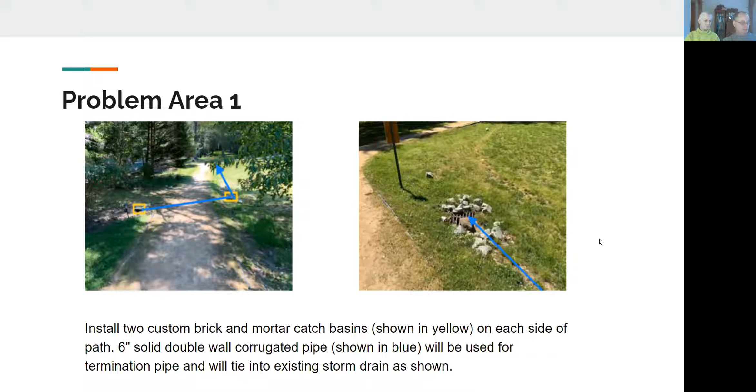The third problem area is probably the largest one. This is over by Audrey Wynn and Alan Perlman, and then Karen Mitchell's vacant lot here and Karen Mitchell here. This area receives a lot of water. If you walk the pathway, you'll see that from Audrey and Alan's side and the Nielsen side, downhill goes from the left to the right, and also from back here where Shahar and Neva and Cheryl and Pete and the Nielsens are, water runs downhill towards Solterra Way.

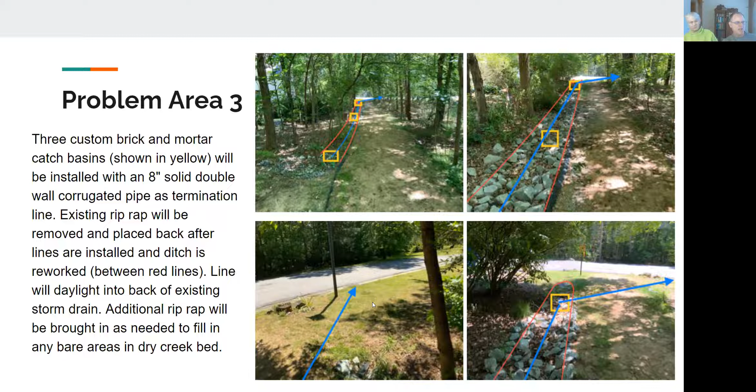I guess I can take questions if people want to, or we can discuss however you guys want to run that part of the meeting before we go into lighting and path surfaces.

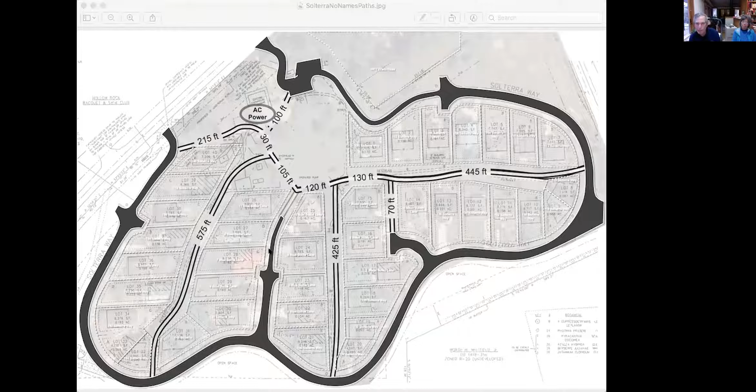So at the moment, this is a 12-volt system, it doesn't hurt anybody. It can be spliced into and put on either side of the path. It doesn't have to go just on one side.

But what it does is it doesn't cause your pupil to contract as much, so you still have your night vision, but it illuminates the pathway. So essentially, that's a basic overview as I see it.

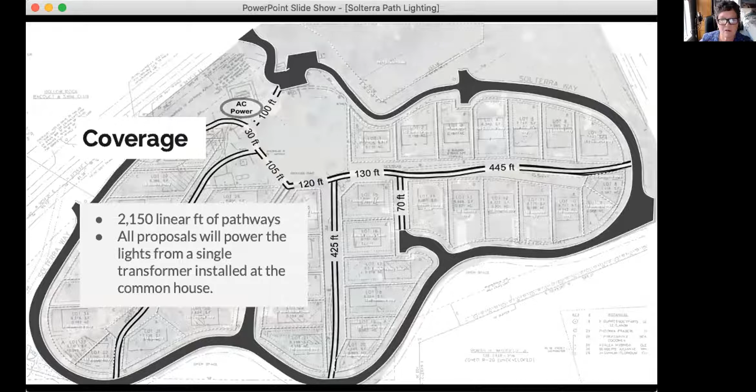I'm just curious about what keeps the lawnmower people from running over them. Right.

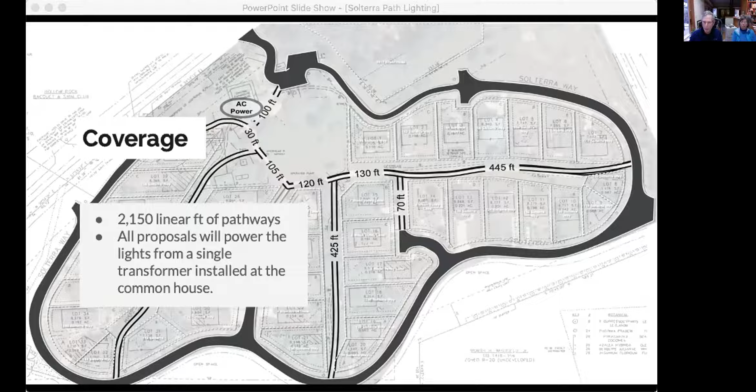The lights would be embedded in a concrete bollard or a post, and the light would not just be a flimsy 1-inch diameter metal stem. Instead, it would be set into the concrete. One of the specifications we requested was that TROSA with their riding mower won't just mow it down, not to mention a dog walker pulling it over. The concrete posts could also be... keep in mind the posts themselves are maybe 12 inches tall, maybe 14. And then above that you have the lighting fixture itself that's set into the hole.

It could be wood. It could be a 6x6 treated post or a 4x4, depending on the location. If no one sends a mower down some of these pathways, this probably doesn't have to be as sturdy, unless you want to consider dog walkers. And I think this is part of the details that we can certainly discuss.

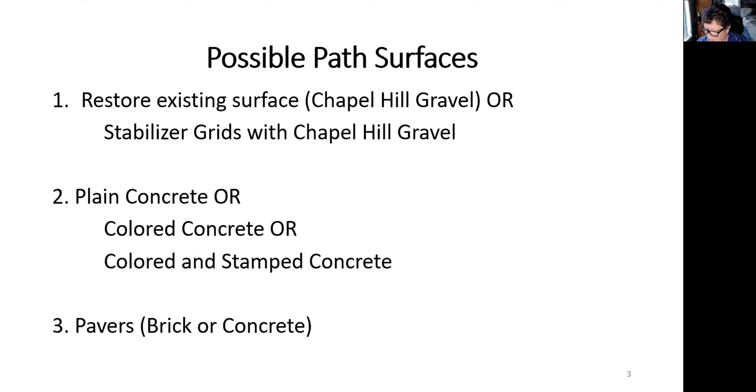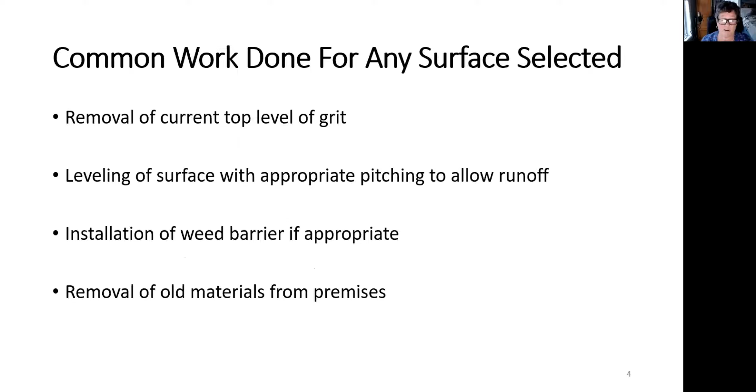Tom and I sought out multiple bids from local companies for each type of surface. We went and looked at examples of many of them, and we feel pretty confident that the bids we got are accurate. One thing to keep in mind is that for any path surface chosen, the contractor will do the following: remove the current top level of grit, level the surface with appropriate pitching to allow water runoff, install a weed barrier if appropriate, and remove the old materials from the premises.

So the first choice is to restore the existing surface, which is Chapel Hill gravel, a decomposed granite. They would scrape off the top, correct any leveling needed, install weed barrier and metal edging. We currently have mostly plastic edging, and then install the gravel on top.

The pros are that it's long lasting—the current path is about 20 years old—and it's attractive and nice to walk on. Some of the cons are that it needs regular maintenance and weeding, and as the path becomes older, more grit is loose and gets walked into our houses.

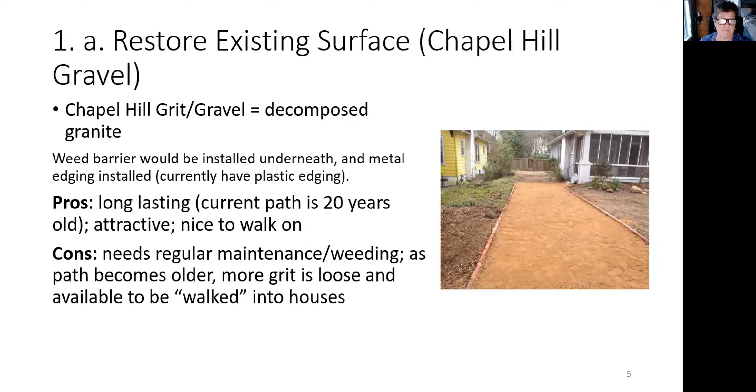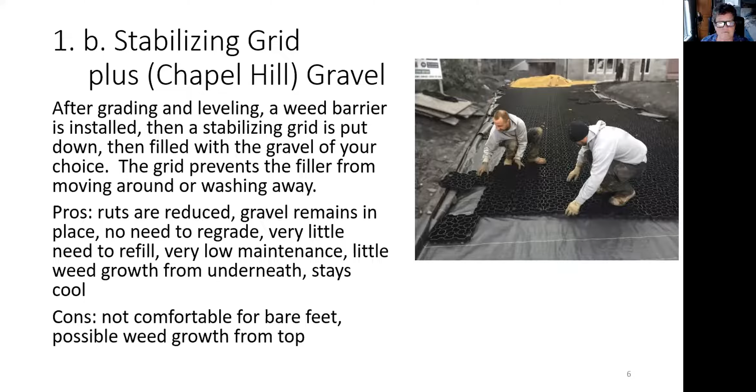So then we come to the concrete options, and the first one is plain concrete. We all know what it looks like. It's low maintenance, very durable. Concrete sidewalks have lifespans of 30 to 75 years. It's a cooler surface to walk on in the summer. It's easy to sweep or shovel in the fall and winter, and weeds don't grow through it.

The cons are that it can crack over time if not installed well, and if that happens, the entire section has to be replaced if it's damaged. Plain concrete is also susceptible to visible staining from leaves, so we're pretty familiar with that.

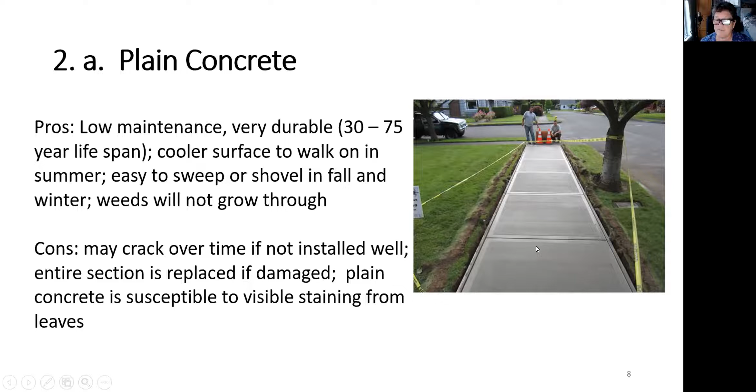Another type of concrete is colored concrete. It's pretty much the same pros and cons as plain concrete, but it's a different color, so it would look different, and leaf staining probably wouldn't show up as much. There's a wide variety of shades available for colored concrete.

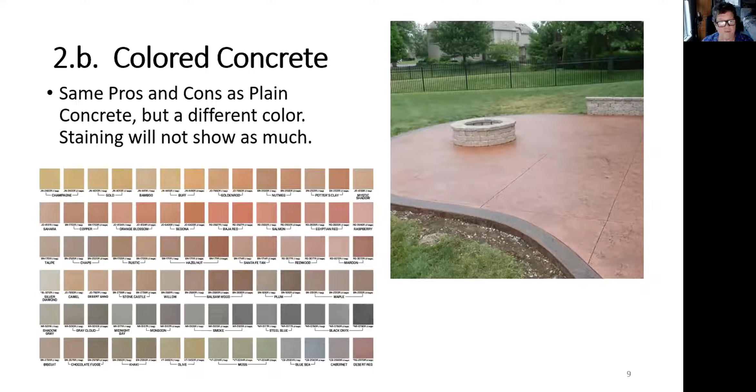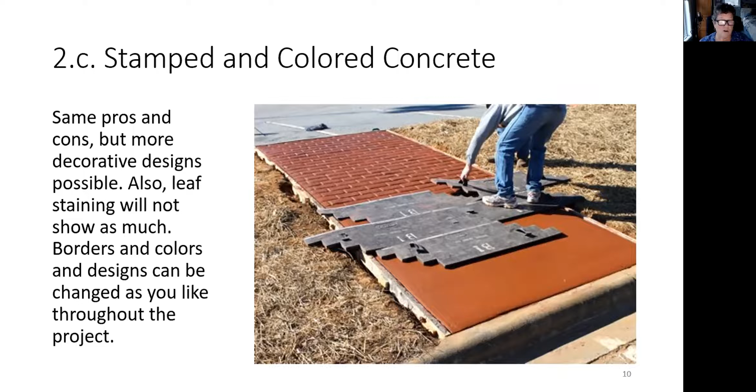A third choice in the concrete family is stamped and colored concrete. It's pretty much the same pros and cons, but it can be more decorative. Leaf staining won't show up very much, and borders, colors, and designs can be changed as you like throughout the project, so one end of the path can be a little different from the other end if you like.

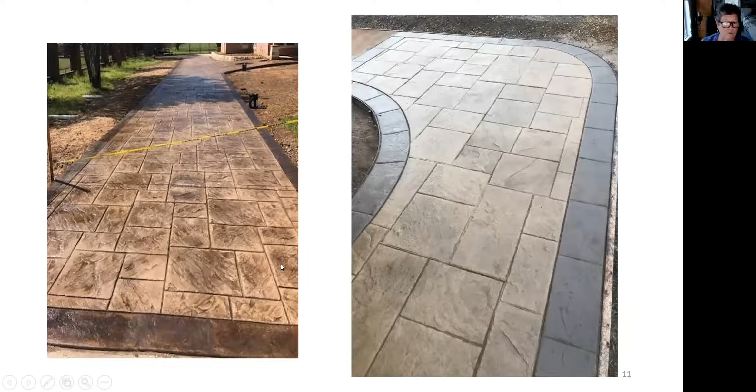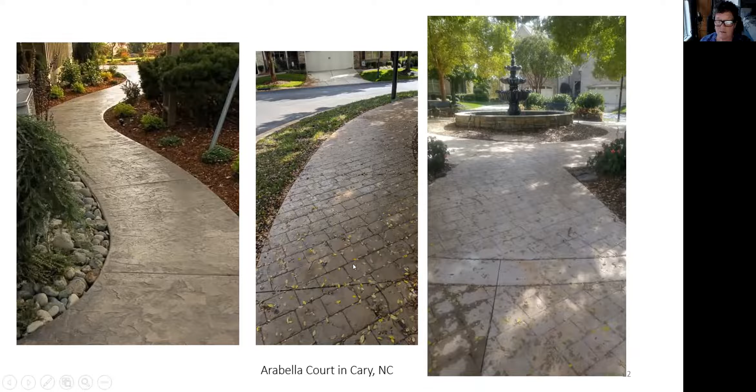Tom and I went out to look at some work that a contractor we were talking to actually installed in Cary, North Carolina. They look like pavers, and you can see they have expansion lines in them to help control cracking. They can follow any curve you want, and upkeep on them is pretty easy.

Our third option is pavers. They can be concrete, brick, or stone, and they're installed on a carefully prepared base. The pros are that there's a variety of designs available, it's easy to replace individual pavers in case of breakage, you don't have the curing time that you have with concrete, they have a very long lifespan, and they're pretty easy to keep clean in terms of getting leaves and debris off of them, and they're comfortable to walk on.

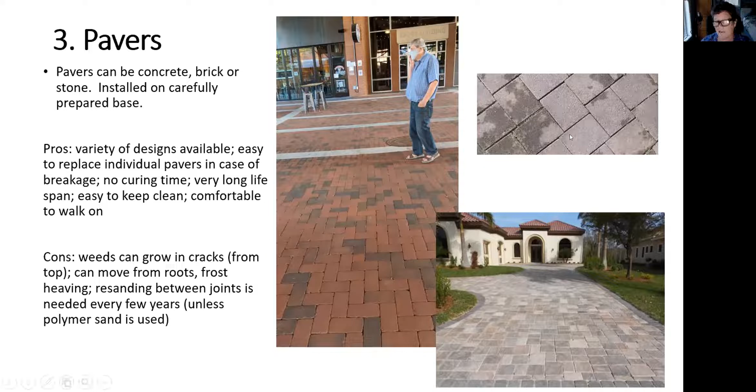But here's some of the looks that you can get. There's actual bricks, there's concrete pavers, and stone. This one was a different contractor, but that contractor had actually put in this path out in Graham, North Carolina, using pavers.

Under ecological impact, I wanted to talk about that briefly. Paths are basically impervious surfaces, and there are two ways to think about the paths in our community. Our community is taxed on the amount of impervious surfaces that we have here in Solterra, and that is included in our utility bill, which is how it's taxed in Durham. But our path is already labeled as impervious, so it won't change that at all - it won't change the amount we pay in utility bills. The other is that the clay type of soil we have here is pretty impervious on its own, so our water basically runs off our path into our ditches and drainage systems. So no matter what type of surface we choose, it'll be a similar impact.

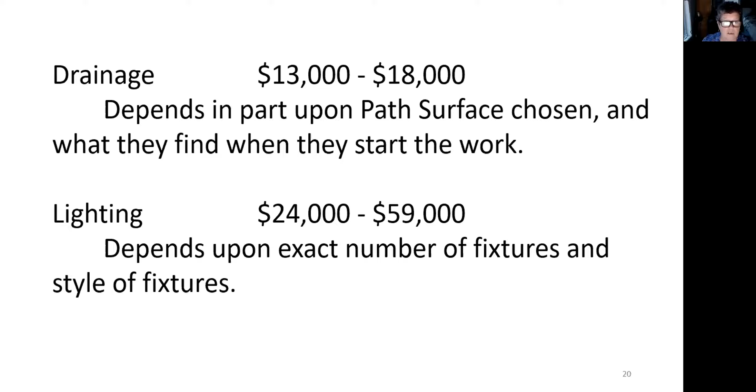So I made a chart for this. The first numbers you'll see will be the cost for the surface, then the lighting and drainage, and the total range. So the first one is if we restore the path to its original condition: the surface would cost $48,000 for the work of scraping it all off, regrading, putting down weed barrier, and replacing or putting in new grit and new gravel. The lighting is that range, the drainage costs the same, and the total range would be from $85,000 to $121,000.

The grid and gravel system is $84,000, and the other costs the same, so we have a range of $121,000 to $157,000.

Moving on to the concrete suggestions: plain concrete would be from $75,000 to $118,000, with a total cost of $112,000 to $191,000. The colored concrete ranges from $78,000 to $91,000, with a total range of $115,000 to $164,000. The stamped and colored concrete is $117,000 to $167,000, with a total price range of $154,000 to $240,000. And the pavers would cost from $130,000 to $250,000, with a total range of $167,000 to $323,000.

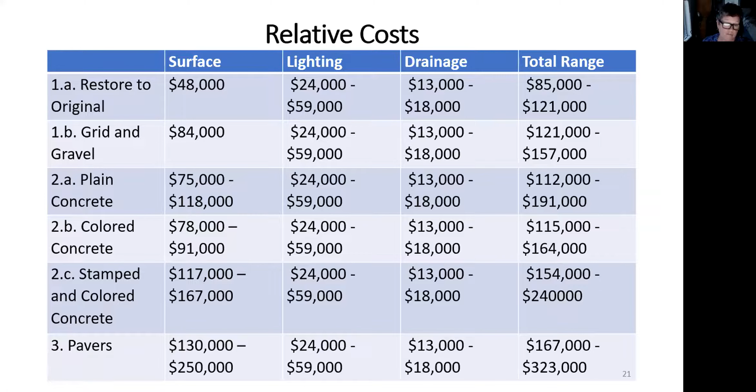So there's a lot of variability in what the cost would be, and even among, like if you look at the concrete, there looks like a big variety there, and there is. So we would work to get the best price with the best work that we could. But this is what we found, this is the information we gathered.

So the next steps are that we would like you all to ask clarifying questions of the Paths Committee, and we would provide those clarifications by mid-February to the entire community. The committee asks the community to discuss and narrow down your choices to one or two. We'd like you to discuss it with your neighbors, just kind of socially and on your own for a while before the February community meeting.

At the February community meeting, we'll have a more formal way of discussing this, and we will discuss it as long as we need to make a decision. We may go into March or April to do that. We're hoping it won't take quite that long, but we have that option.

The PATH committee will work up a more complete proposal for one or two selections and address all the community questions. So if you come back and say we want ABC to go with this, we can go back to the contractors and get a firmer price based on the changes you've asked us to make. We'll make a final proposal to the community for a final decision, and then the PATH committee's job would be finished. At some point before then, the board will appoint a committee to determine the next steps, which would include financing.